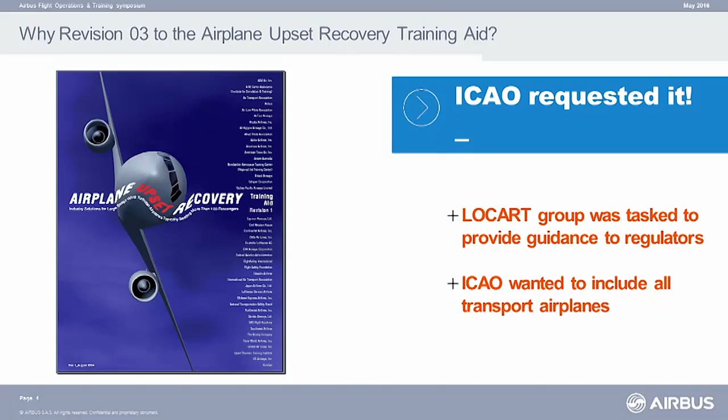But beyond that, there were two other significant reasons. I thought, what's wrong with Revision 2? If you recall, the original document covered all of these airplanes and quite a large section of academics from the aerodynamics point of view, as well as a draft training program that everybody could use. Then Revision 1 came along after a fairly highly visible accident in 2001, where the NTSB, the National Transportation Safety Board of the United States, and the FAA requested that Airbus and Boeing regroup the team, which was a pretty enormous team, to develop a revision to the training aid to include proper use of rudder, to recognize improper use of rudder, but to promote proper use of rudder.

And then again, after an accident that Xavier had mentioned, there was reference to very high altitude work, so the second revision came about. So to satisfy ICAO's requirements of including the regional straight-wing turboprops, I thought, what is wrong with revision 2? And with this fairly large group at the LOCART deliberations at ICAO in Montreal, most of the people would say, oh yes, this is quite a good document, we all use it. But then I would discover that they would reference things that were not in the document, but actually were in the document.

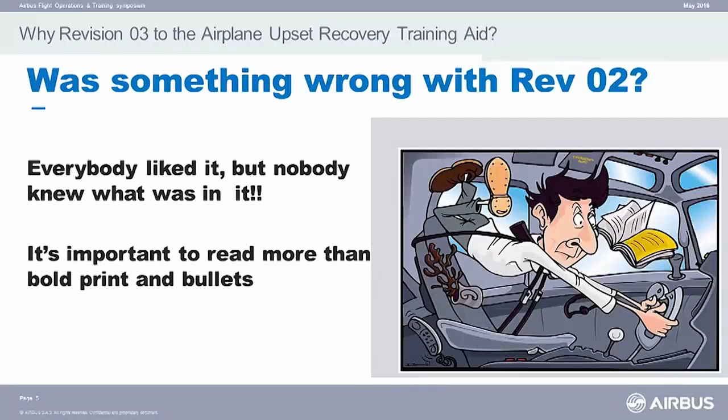Airbus had come along, and Dominique mentioned this in his opening this morning about documentation. Airbus came along with a really great method on the 380 and the 350, and it's finding its way to other fleets, of using documentary units where we've got different levels of information: need to know, nice to know, and an academic level. This seemed to me a very good method of applying the upset training aid so the user could look at this document and take what they must know, and that which is nice to know they have the choice whether to go to or not. So this was a very big motivator for me.

Secondly, during the LOCART deliberations, the chair asked if I would chair a subcommittee of OEMs, of 5 OEMs, consisting of Airbus, ATR, Boeing, Bombardier, and Embraer. And there was an epiphany for me, because at this point I'd been working on the upset recovery training aid for over 17 years. I discovered at the very first meeting with the other OEMs, we had a tremendous amount in common.

The original training aid took us nearly 5 years to produce, because it was a huge group consisting of airline pilots, trade unions within the industry, and regulators. To have such a large group develop a consensus document, we were actually pretty lucky to get it out in 5 years. But what we discovered with the 5 OEMs is that we all spoke the same language, we faced the same challenges. The experience we had, as Xavier had alluded to in the development of an airplane, and seeing how all the airplanes are operated around the world, is real-time feedback, real-time input, and not assumptions and conclusions made while working in simulators, which was the case with the original document.

So between those two topics, I became really motivated towards chairing this group. But I said to ICAO, I would go to Mark Parasis to achieve approval to go ahead with this - Mark Parasis and Fernando Alonso, who was running the flight test division at that time - to which they both agreed to go ahead with the concept. But the proviso was that we would not get together this massive group once again to try and reinvent the wheel, which already works pretty well if it's used. The group would consist of only the OEMs with one additional input, a member from ICAO, since it would be their source document.

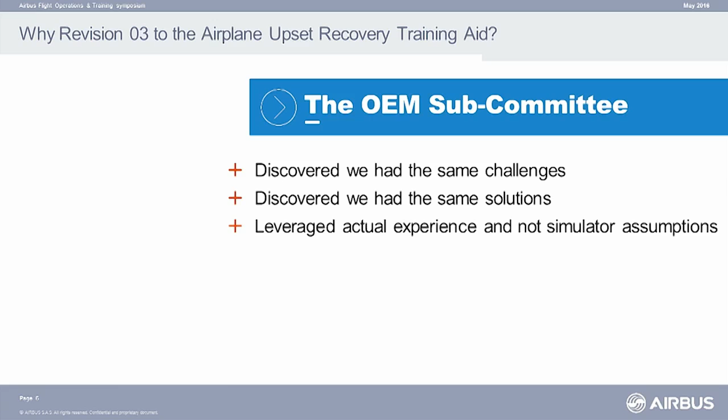So, what's new in Revision 3? In fact, there's quite a bit that's new. I've touched on it already. It includes turboprop transport aircraft. The way this training aid will be available to the user is they'll have three options to enter into the training aid. The first is to select T for turbine, swept wing, P for propeller, which would only give the specifics associated with your airplane, or T and P, which would be a collection of both - a very simple selection at the onset.

And for all you users out there, when it is available on the market, I would recommend that you use the T and P for two reasons. One is there's not a tremendous amount of difference between the two, but I think most of us started on some sort of a straight-wing propeller airplane, and the review is very, very healthy for looking at the overall context of the training aid.

The second item, which is a major change, came about recently with an idea I got while at the EASA rulemaking for upset recovery. It's the actual definition, which we formed over a long period of consensus building in the 90s. In the original, we said unintentional exceedance of plus 25, minus 10, 45 degrees of bank, or inappropriate speeds. What we've done is remove the parameters, because they've been misleading for two reasons.

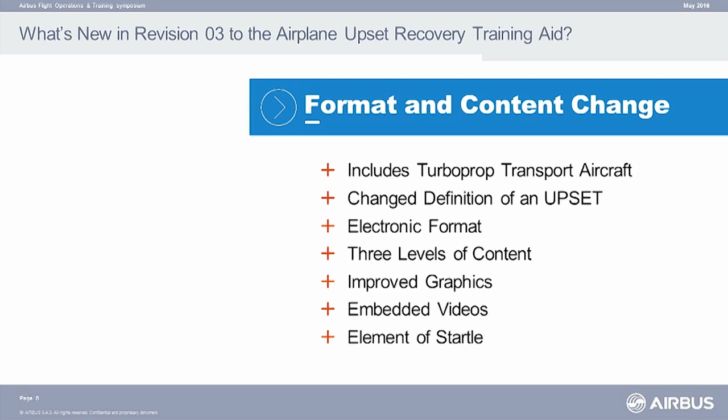By virtue of being in the simulator, you know that certain items are going to occur. By showing a PFD for a short period and then having questions behind it to draw the pilot's attention to what should be focused on first, before you put your hands and feet into gear, that's the whole purpose. We think it'll be an effective method of surprise.

Additionally, a big change from the original and the first two revisions is that the OEMs are going to recommend what should be trained, substantiate why it should be trained, and then leave it to the ATOs to decide how to go about doing it. You are the training experts, and as such you should be developing the training for your particular organizations, but we will supply the guidance of what should be done.

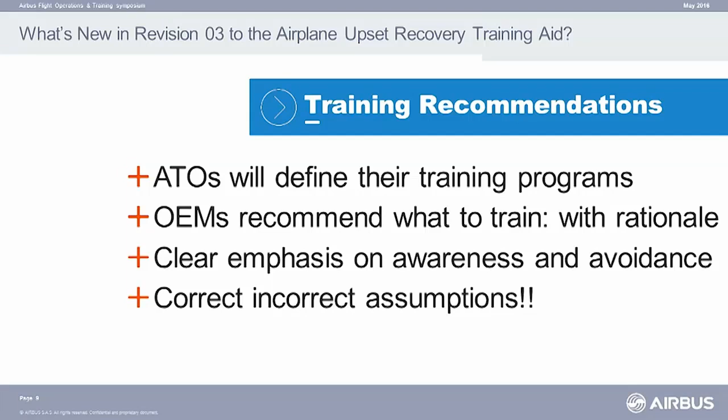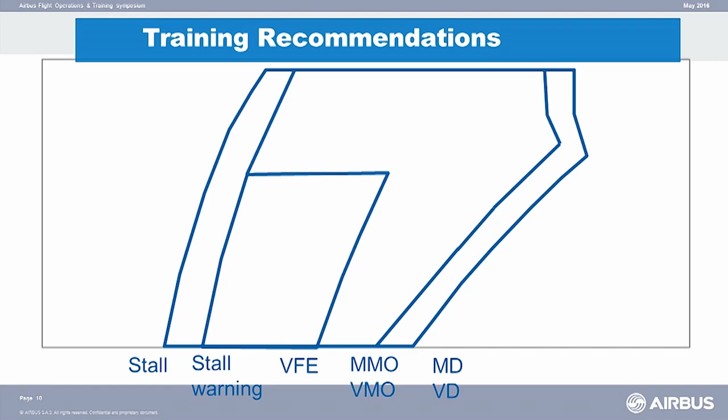We also need, very importantly, to amplify something Xavier said a while ago: to correct incorrect assumptions. At the onset, back in the 90s, because we had a room of training experts, we all assumed that pilots are already proficient throughout the envelope of their airplane. As Xavier pointed out, this is absolutely not true. Passing a type rating or a proficiency check is not a measure of how well and how globally, within the entire envelope of the airplane, pilots are proficient.

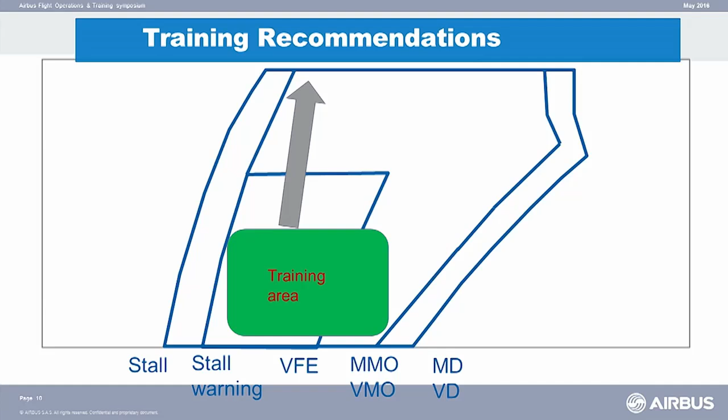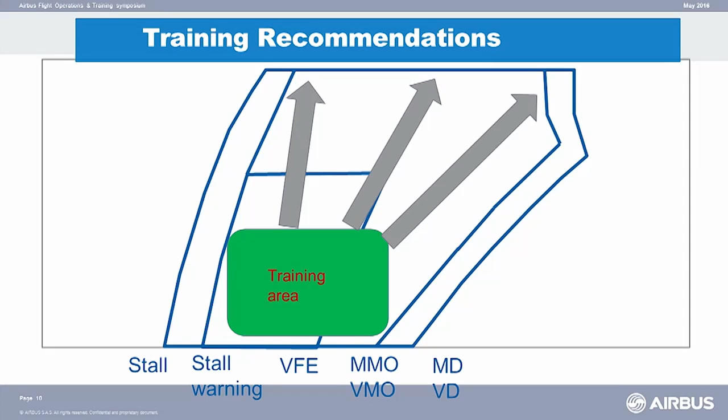Having said that, it's rather a leap of faith to think you can go from that green area to beyond the gray arrows with a close-your-eyes scenario and expect pilots to have a legitimate expectation of recovering. With that, I will hand the mic back over to Xavier to talk about undesired aircraft states.

So it's only limits? No, it's continuous. I want to fly 250 knots, the speed is decreasing, I don't know why. Is it due to wind? Is it due to temperature inversion? No, I have to control it again. Be engaged, as Larry said.

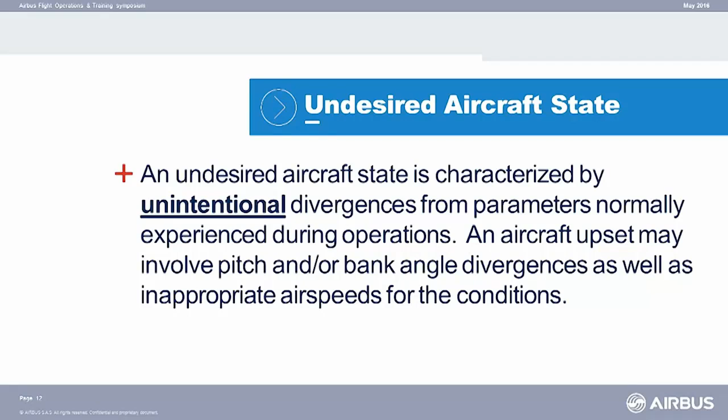Undesired aircraft states. It came - well, that's all, that's quick. So we had the stall training.

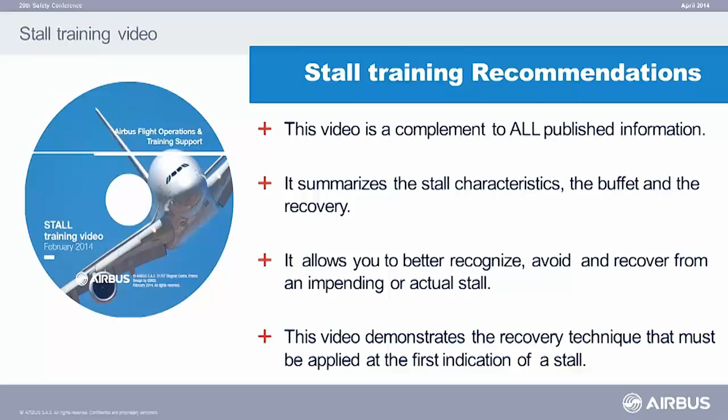You have the video, I will not come back on that, but it gives you complete information on one of the upsets of an aircraft, which is a stall. Remember what you see in this video - it's done during test flight, and it's not aimed to reproduce what we do in the video. As well, if you have this kind of situation, you apply what is written in your FCOM, flight crew training manual.

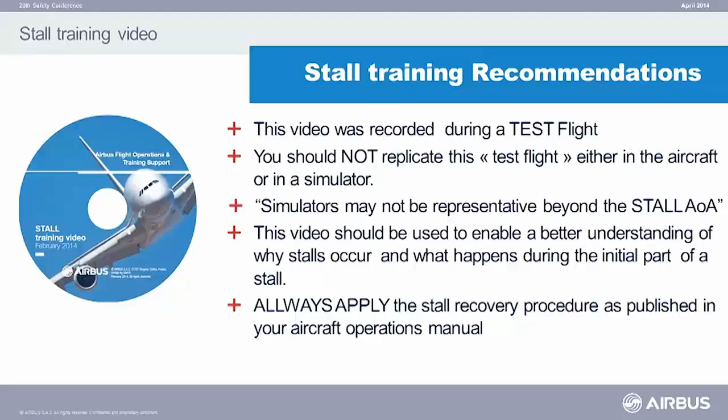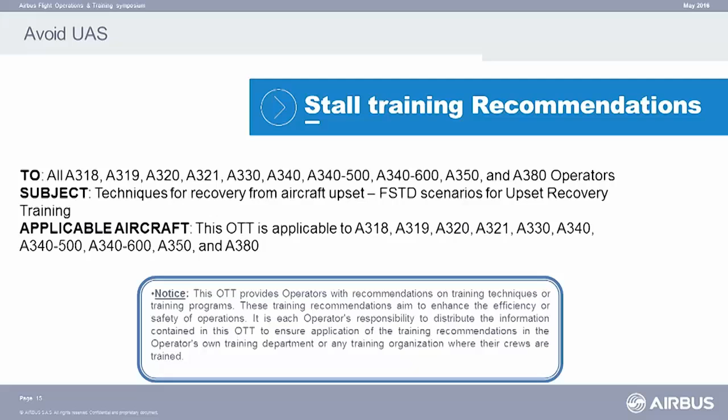Next, so we have an OTT on that, on stall recovery as well. I do hope that you're all familiar with that. If you don't have this document, don't hesitate to contact us, and we will provide it to you.

So upset recovery training, it's not about having fun in the simulator or to scare the other pilot. No, the idea is to control the aircraft within certain limits. These are little photos that I took when doing some exercises in the simulator.

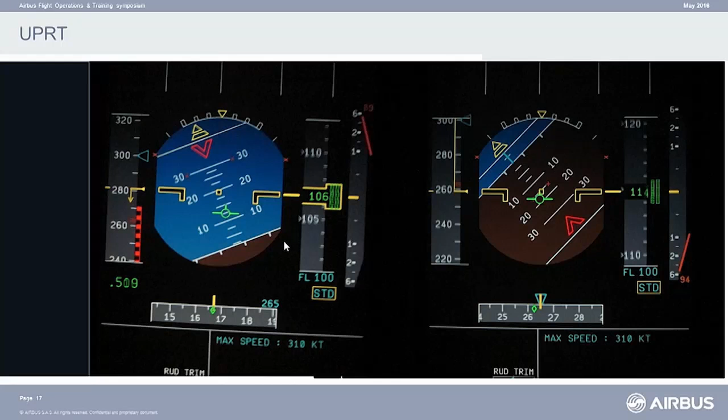What is quite important is things that we want to replicate and put into the data package - that if you come into an upset situation, you see that the angle of attack remains within reasonable values. The same in nose down or nose up, that you can recover. This we'll try to introduce. So this is what we have to avoid and prevent, to come into those situations.

For that, we will issue, as I said, an OTT by the end of this week - normally, I hope so, or it's next week then - on nose high recovery techniques and nose low recovery techniques. There are two parts in that. Pay attention to some items that you see - next to each item there are little numbers which give reference to a text next to it.

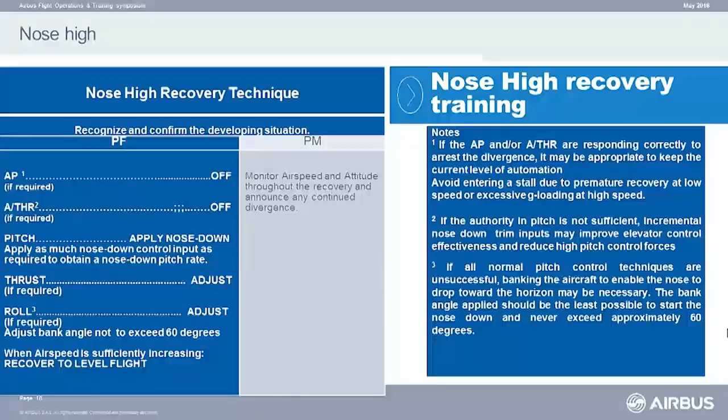If you have a nose high recovery technique and you see 'roll, adjust bank angle not to exceed 60 degrees,' it's only and only if all normal pitch control techniques are unsuccessful - this means you push, you use trim, or you use the elevator, and it's not working - only then do we recommend you take some bank to get the nose down. It's not the standard technique. So you really have to see all the little points and emphasis. At first glance you say, okay, I have to hold it sharp - no. Look at this, inform your pilots and check if they do it correctly when you train.

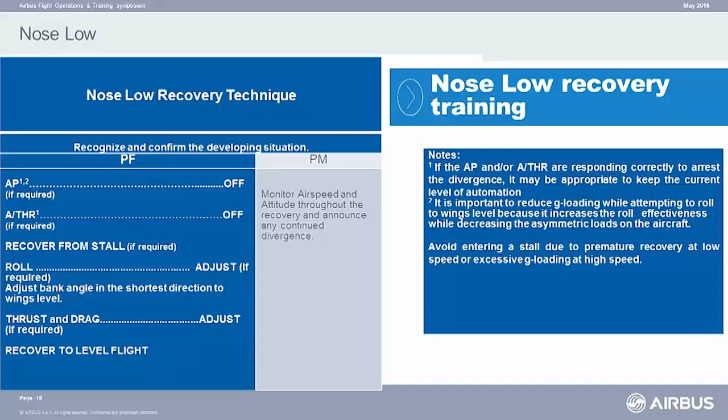The same with the nose low recovery technique. There is a template as well that will come out in the OTT and will provide you with more information than in our FCOM and FCTM.

So the exercises, when you do that, are instructor-led exercises. It's maneuver-based training when prevention has failed. So prevention is the key - you do everything to avoid coming into those situations.

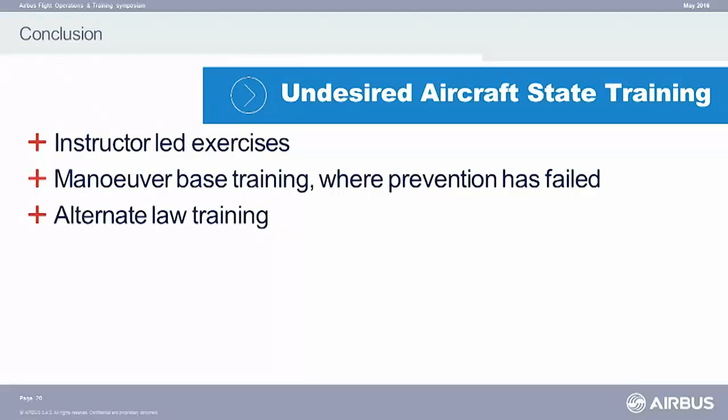It's an alternate law, the training that we do. You can do some in normal law, but we recommend doing it in alternate law or degraded law in an aircraft - question of the motion. Do we use motion off or motion on? Well, basically, as long as you stay within the normal envelope of the simulator, the validated training envelope of the simulator, you can use it. If there is a risk of going beyond, don't use the motion, because it will not be representative. The simulator is representative in the normal flight envelope, there you can use it. If you go further, don't use it, because you will not have the extreme G's that you will feel in a real aircraft.

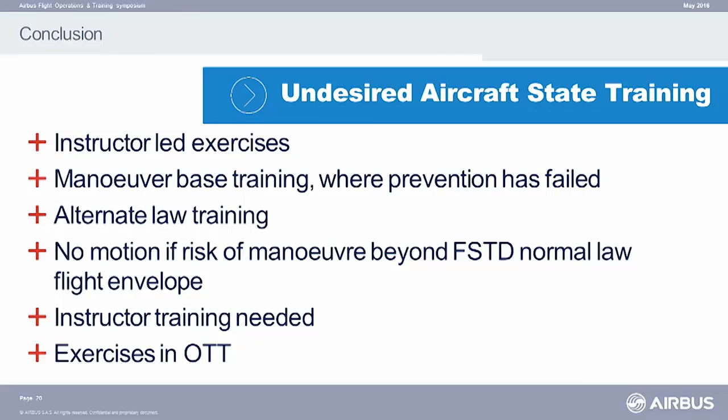And again, instructor training is needed. The instructor must have knowledge of the simulator limitations, must have knowledge of the correct recovery training, and must be able to demonstrate going towards an upset, as well as correcting the upset and demonstrating the correct recovery techniques. Exercises - the first one will be published in our next OTT.

To conclude, a sentence that I modified a little bit from an astronaut, Frank Borman - I changed the word a little bit. An engaged pilot, Larry talked about it, I talked about that, you have to be engaged. An engaged pilot uses his superior judgment to avoid situations which require the use of his superior skills. Thank you.